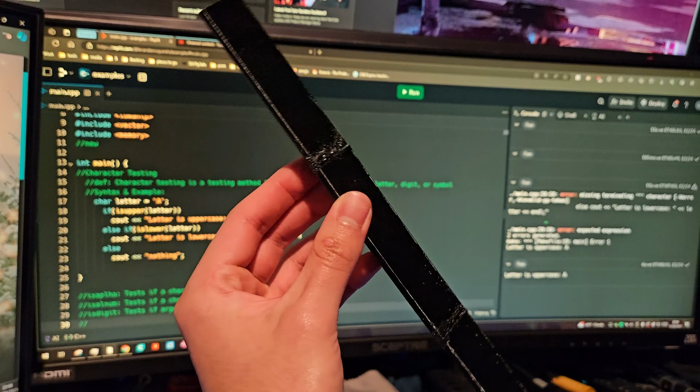Now you can see that they're in individual pieces. You can either silicone or hot glue them together. This is silicone together. This is legit. It looks so much better. It's also solid too. I'm bending it. I didn't really care that much.

You can see the front one's hot glued. You can obviously sand the excess glue off, but I didn't find it necessary. From afar, you really can't tell what it looks like.

Did I mention that these are 3D printed? I printed these from a 3D printer. If you've been thinking about getting one, this is the perfect excuse to start getting one. Or you can find a friend that has one.

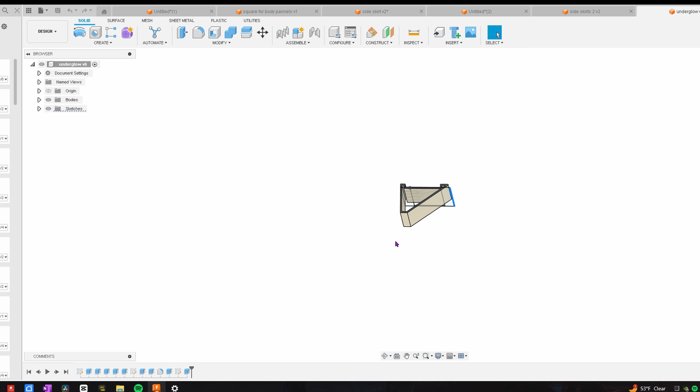So I have Autodesk Fusion 360 that I'm using, and I started off with just a basic sketch, a rectangle, and this is the top of it. After this is done, this was for the whole grooves and everything. You can see the basic rectangle down here. Actually, I can just play the timeline. So the square, you can see what we're building it up.

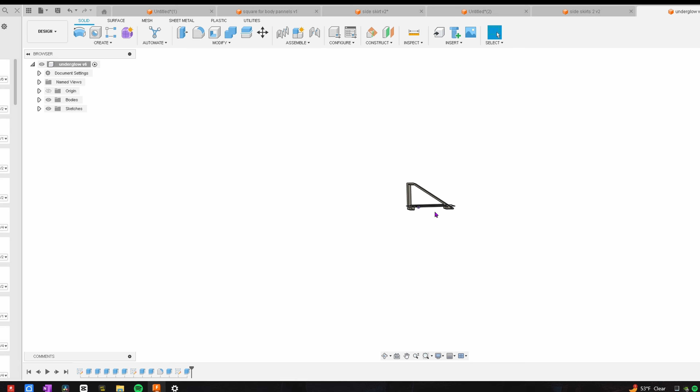We cut it out, and then I took a chunk off for the sloping part right there, and then just made it hollow. Okay, that was really bad and that was really fast, I know.

So what I'm gonna do is explain it to you a little bit better. Let's reverse it over to this. You can see I thought of aerodynamics here, because if you look at other ones, they're kind of like a barn wall and the air is just kind of hitting it. So this one, the air should theoretically follow this slope down here and kind of just curve over it.

Now the LEDs are going to be hiding back here behind the strip. This is all empty space because you don't need it. So I made it super lightweight, and this allows it to be super flexible, so you can bend a lot of it, silicone or glue it together, and then boom, you have a huge long strip.

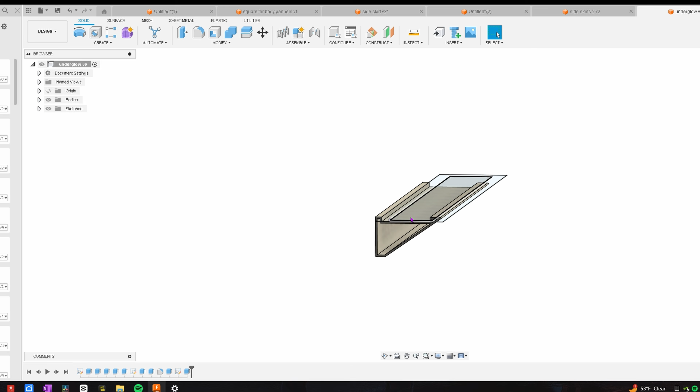This channel is the important part, the part that I'm super proud of. It's not very innovative, I know, but it's pretty cool because unlike other ones, this has a channel for the 3M tape. And this channel will theoretically not let any water or rocks get inside of it, so you won't have to worry about it falling off, and it should stay there for much longer.

Once you have it printed out, it's gonna look something like this. You can change the length of it however you want, print out as much as you want, small or large. You're gonna get something that looks like this.

Now there's 3M tape on the back of it, and that's just so it can stick to the car. This is super light. I currently have tape in the middle because I'm using silicone to bond two pieces together, and it works out really well. This is the seal. The white stuff is from the tape, and this looks like solid one piece.

This 3M tape is super strong. It's called VHB tape, and it's gonna have no problem - wind is not gonna knock this off, nor will any debris.

It will have no problem sticking to the bottom of your car as long as you use some isopropyl alcohol, as well as some paper towels to clean the undercarriage. Use that alcohol on the paper towels and start rubbing it until no other dirt comes off, because you don't want this sticking to dirt, you want it sticking to your car.

Boom, we got the alcohol and the paper towel and the little strip here. It was pretty much dry, so I'm just gonna rip this off. I don't care too much about the perfection. Put this on the ground for now.

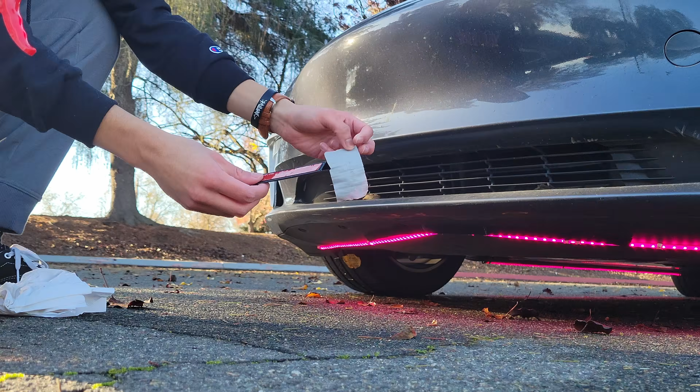Spray some of that isopropyl alcohol onto your towel and get to wiping. Make sure the adhesive is firmly attached to the TPU material. Just do one more pass, pressing it down all the way. And boom, that's pretty much it.

From here, you're just gonna wanna press it to the undercarriage to get that really good bondage. That perfectly hides and protects your strips. If something hits this, it's gonna hit rubber. Now, if it's at low speeds, it might not damage anything. At high speeds, it might rip it off, but that's much better than ripping off your Underglow.

So that's pretty much it. My fingers are really cold right now, so that was kind of hard.